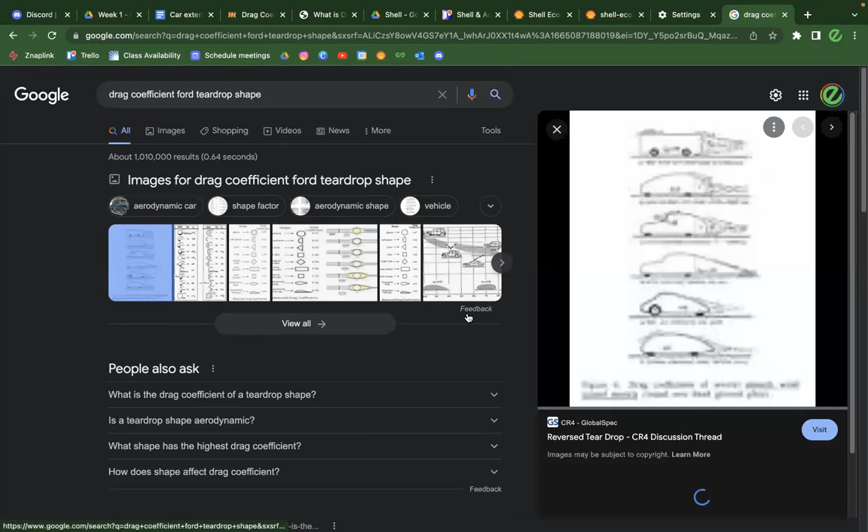Let me open up this image. All right, look at this. If you look at this image, the drag coefficient of a sphere is 0.47, but a half sphere is 0.42. The smallest drag coefficient is a streamlined body at 0.04, which is similar to a teardrop design. As you can see, look at this design and how similar it is.

To this one, see? That's why it looks like that weird oval shape, because that shape ends up creating a streamlined body and a 0.04 drag coefficient.

So we're going to end up measuring our drag coefficient in a simulation, or maybe we can calculate it. You guys have to keep this shape in mind, and we can talk later about what makes a streamlined body. First, let me go through the article because you brought up really cool articles.

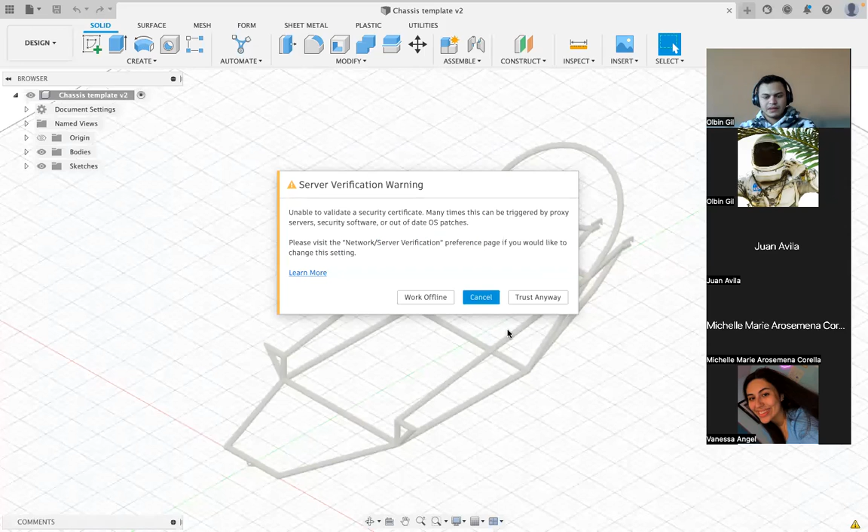Okay, yeah. So thank you, Juan, for providing those articles. It's important to know the basics of aerodynamics, because the shell - that's basically what it's going to be. Based on your knowledge, that's how you're going to create the shell, right?

So first you need to understand how an aerodynamic shape is affected by air. So I suggest, if you couldn't look at any articles today, try to look up any videos on YouTube. There's actually a really good video I'm going to share in the chat later. If you couldn't have time today to watch anything, just watch this video, and I think you'll get a better idea of everything.

But yeah, it's important, right? We learn this stuff. Let me share something else.

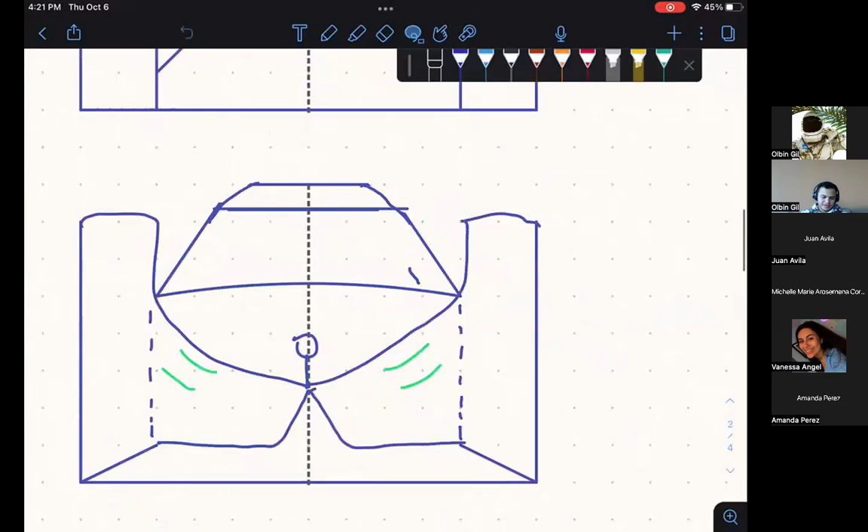Okay, so last year, to give you guys some context, I wasn't the president, I wasn't even vice president. I was like a marketing person for this club. But I ended up working on the shell, this exact part of the car, last year, and I created my own little research and made a proposal of how I wanted the car to look like.

So my idea is to make it look like this type of design, like a racing prototype car. If you guys don't know, this is an LMP1 car, or a Le Mans car. These cars are the most efficient and durable cars that you will find on the planet.

For example, in the race of Le Mans, they run for 24 hours straight at speeds over 150 miles an hour. That means they have to resist a lot of the forces of racing, but also they have to go fast. They have to make sure the design is aerodynamic, and also that they don't waste a lot of fuel. So they are very cool cars.

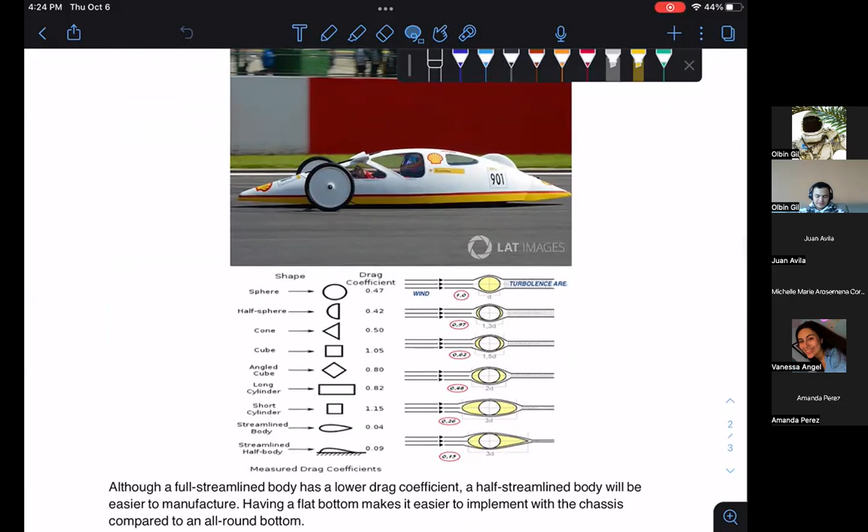So here I have also the little shapes that I showed a couple of minutes ago. As you can see, the car here is a car from the competition - the club or school didn't make it, it was just an example of how the competition wants the cars to mainly look like.

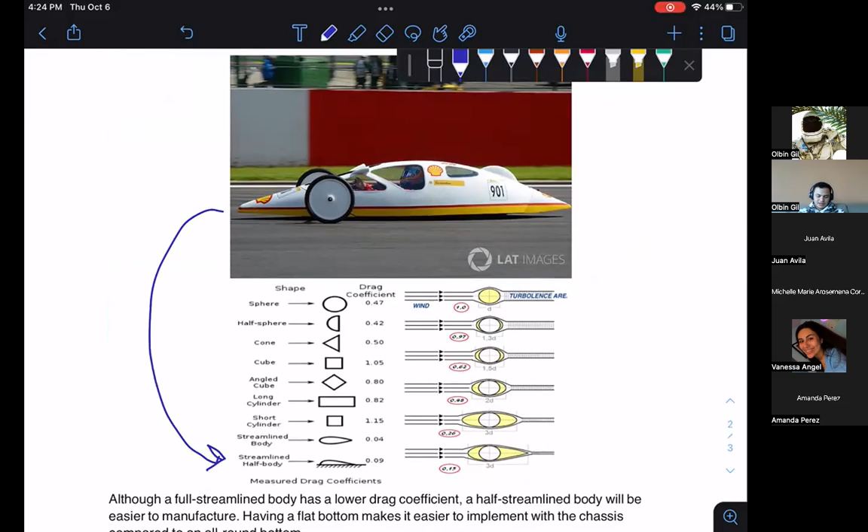But as you can see, they follow this design, and it's also very streamlined, and it just looks cool as well. It looks better than the one that we saw - this is the worst design in my opinion, it's like a half egg. I don't like that.

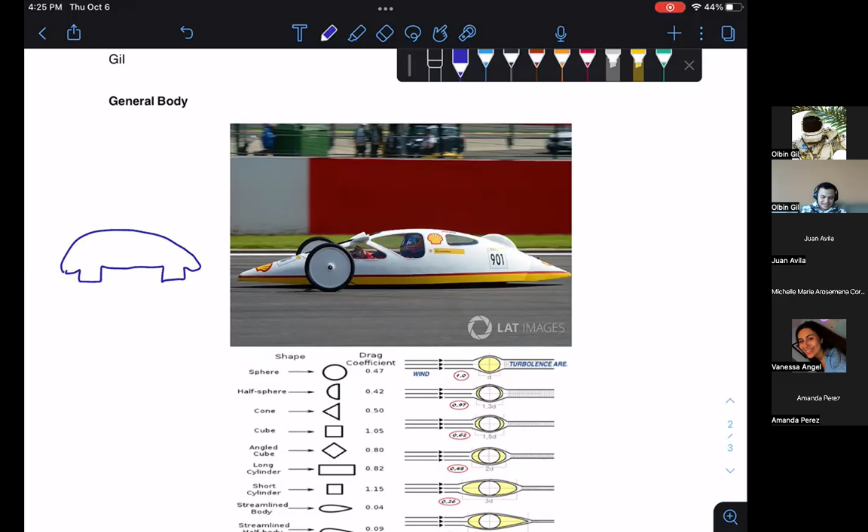So I just want to make our car look cool, you know, not just be efficient, but also look cool.

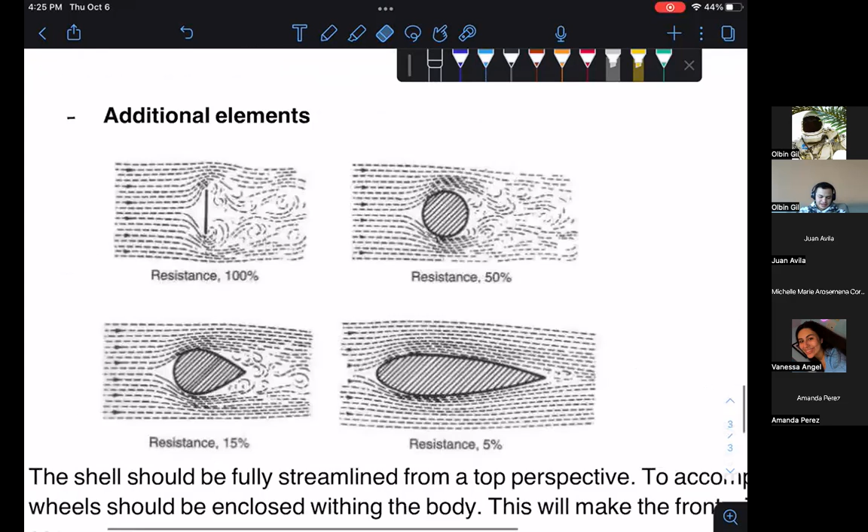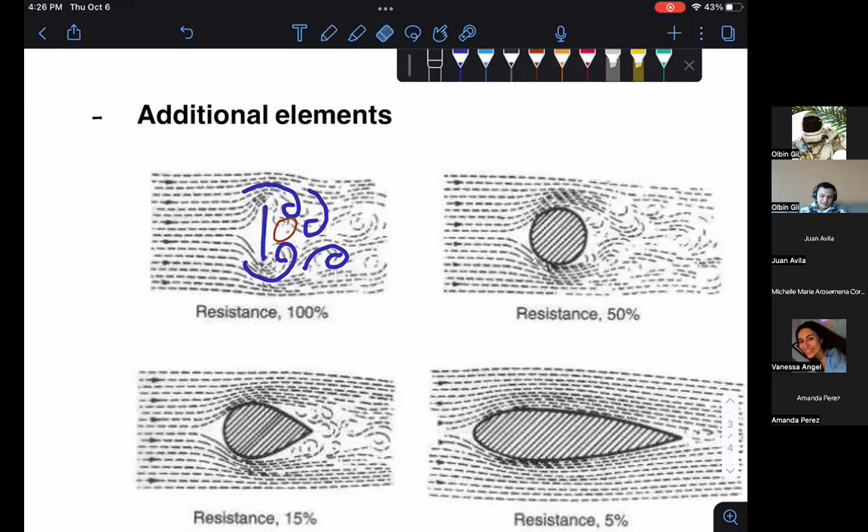So here you can see a bit of how the air moves with different objects. Here there's a wall, and you see how the air moves behind it. These vortices create a vacuum here, and if the object is moving this way, then the vacuum is making a force in the opposite direction. So to minimize that, you can round it off. But you can see it's an abrupt change in direction for the air - it goes like that, and then it still has a lot of speed, so it's going to go like that, instead of creating a vacuum here.

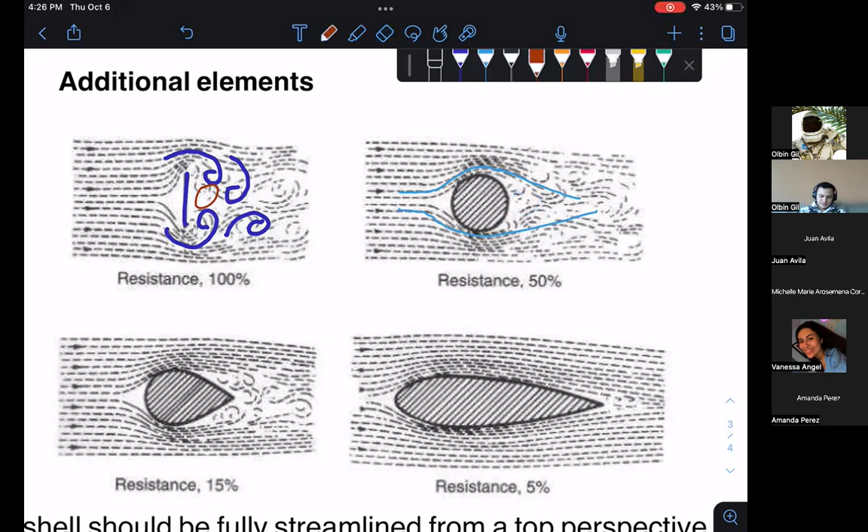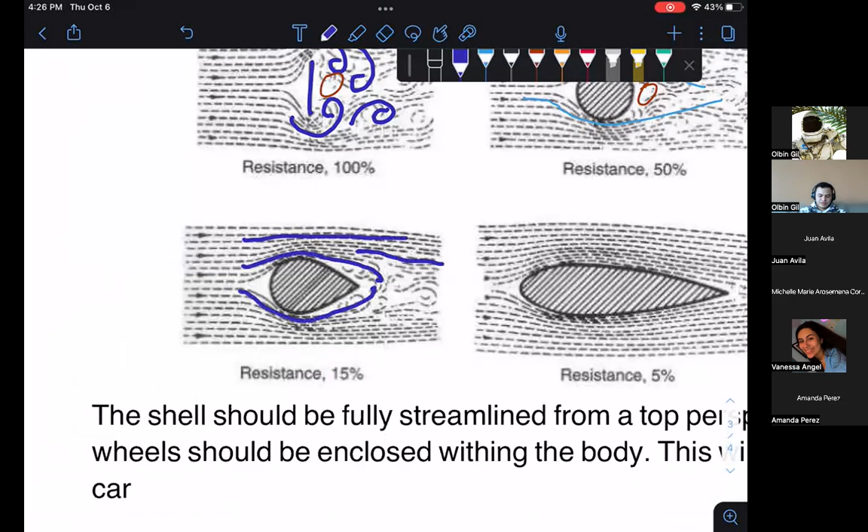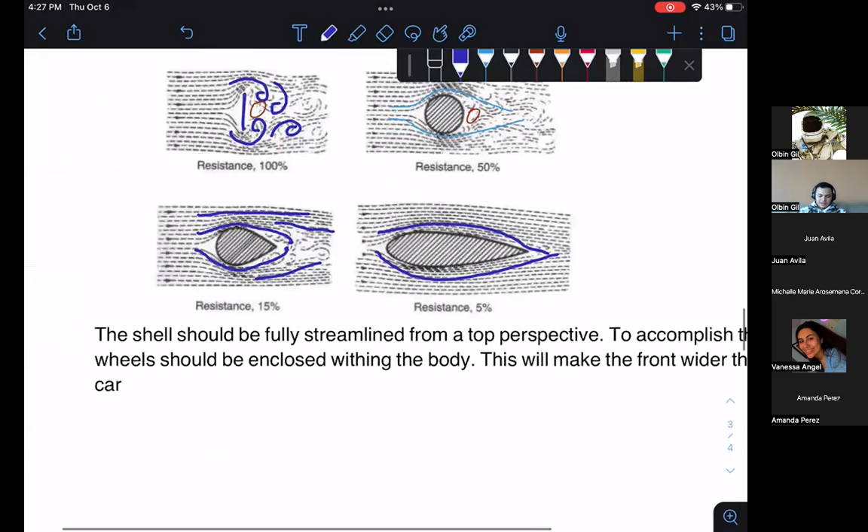And then here, resistance is 15%, and you see how it's a bit less draggy - the air is just flowing around nicely. But this one is the optimum design, where the air goes back to its initial path. So it requires a lot of creativity to create a streamlined design that is not basic.

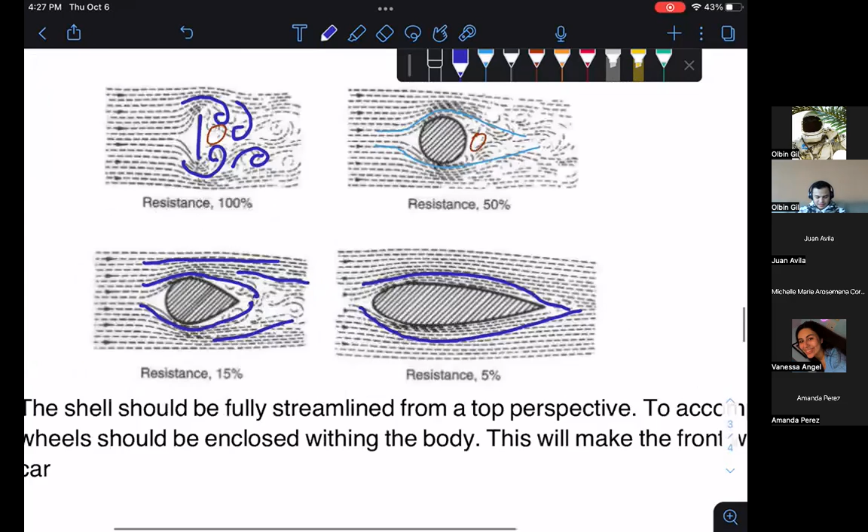You can just make a design like this one and call it a day - we could do it like that, but we'd like to be better than that. So let me show you my initial sketches.

I think it's on this one. Oh no, wait, don't look at that. I don't think I have... Okay, let me see what I can show. Okay, so I guess yeah.

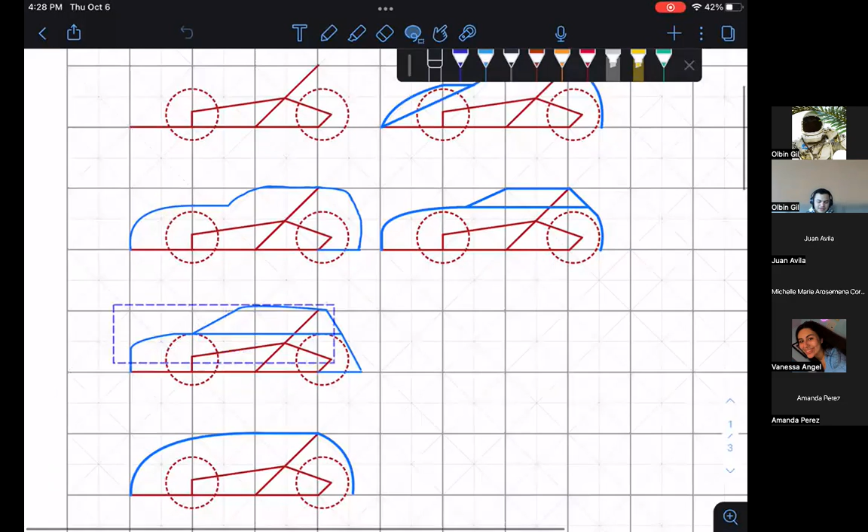So I was playing around with the design. I suggest you guys do the same thing. I first created the chassis, like a little drawing with the chassis on the side view, and I played around with different designs, how I want the different parts to look.

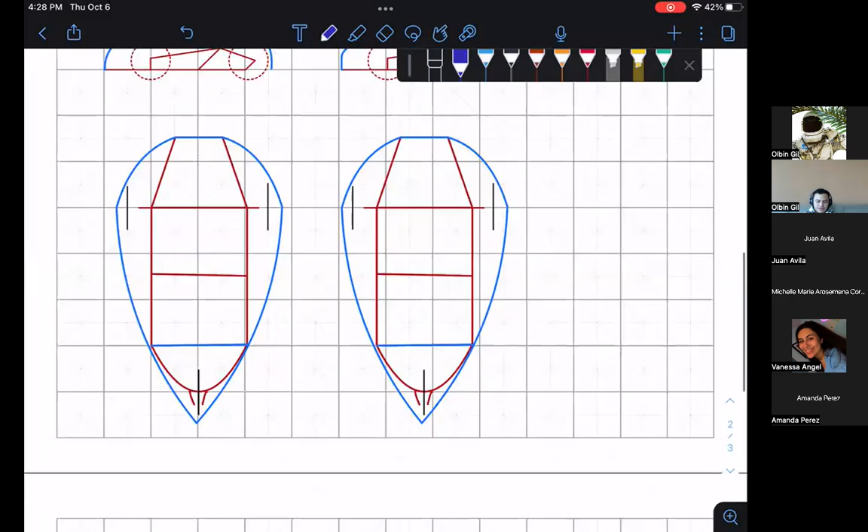If you guys don't know, we are using 3 wheels, 2 in the front and 1 in the back. I'm gonna show the chassis in a minute, and the chassis looks something like that, how the red thing looks.

But then I solidified my idea into this.

If you guys look, there's the general shape of the object. First, here's the bottom, and then there's the top side. So I created lines around it to make it look good.

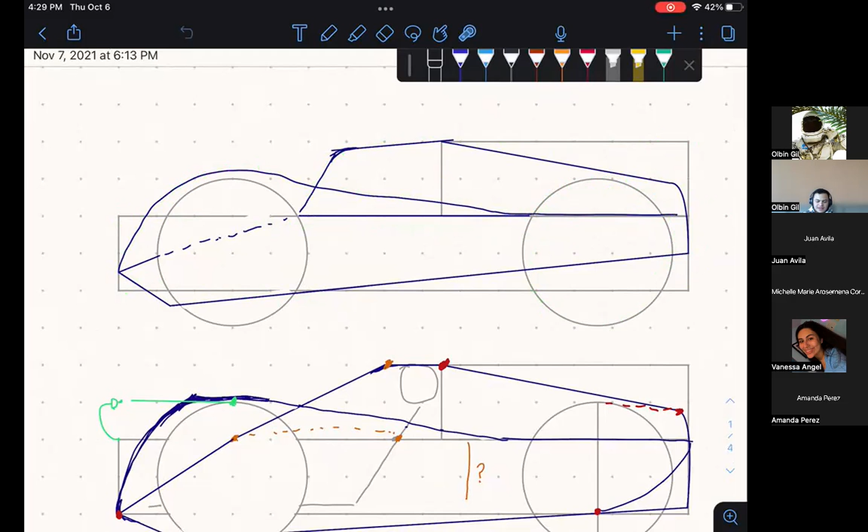But this was just a sketch. Then I made it better. As you can see, this looks so cool in my opinion. I don't know if anyone agrees, but I wish our car could look like this.

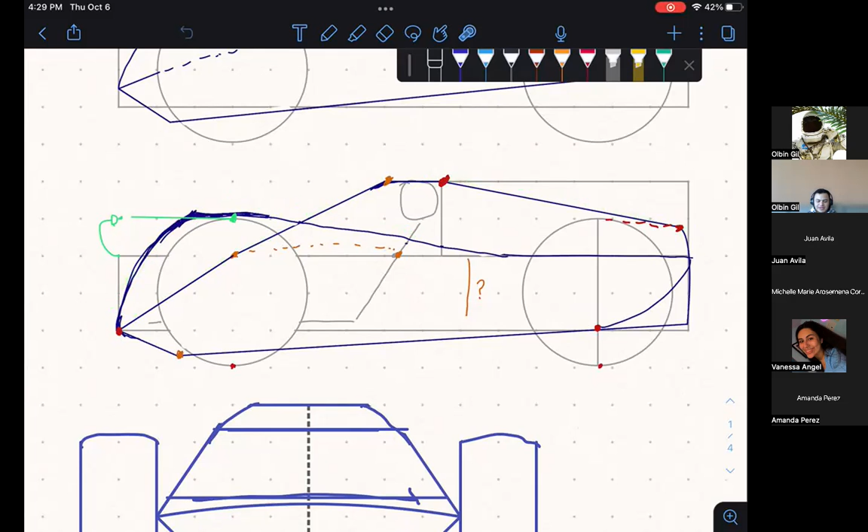I tried to make it look like a race car, like a supercar, like a Ferrari. How the Ferrari has the wheel over the nose, so the nose always comes down under the wheel, and then it has the back here, and a little thing channeling the air back into its direction. And here's the front.

So this is intended to go to the nose. This is the nose, and the lines are intended to go towards the nose.

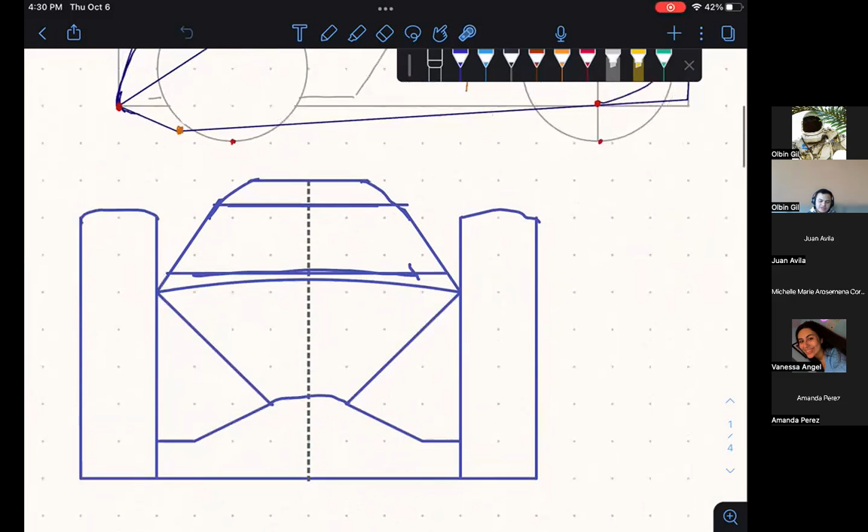Oh yeah, this is a little thing. I was thinking of adding a little logo, like how Mercedes has their star. I was thinking if we could do something like that.

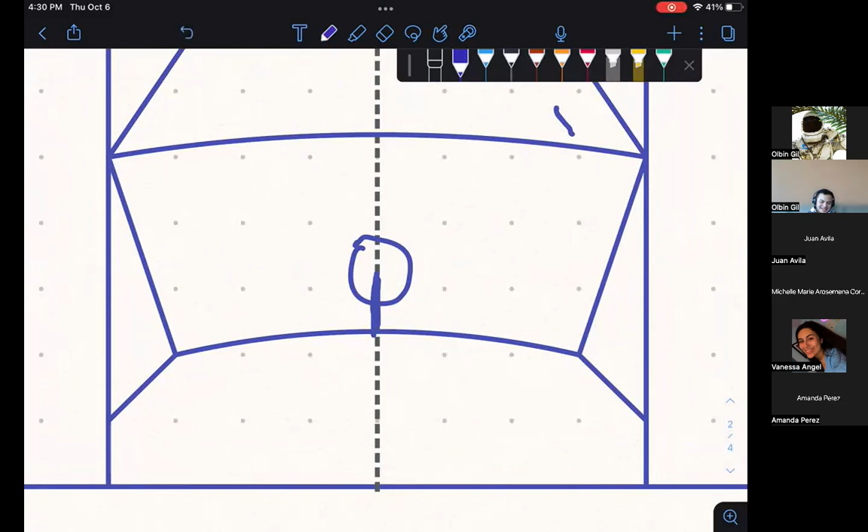And then maybe do a little thing like eco, here, let's see if I can do it like that. That would be so cool. Does anyone agree? Imagine if we could do that. That would be so cool.

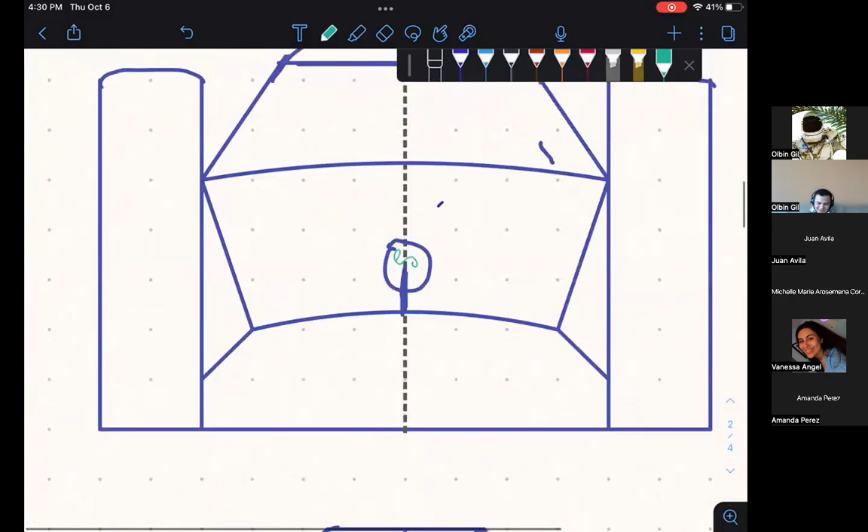Yeah, so that's my initial designs, but then if we go here, see, RV2. Thank you, Amanda.

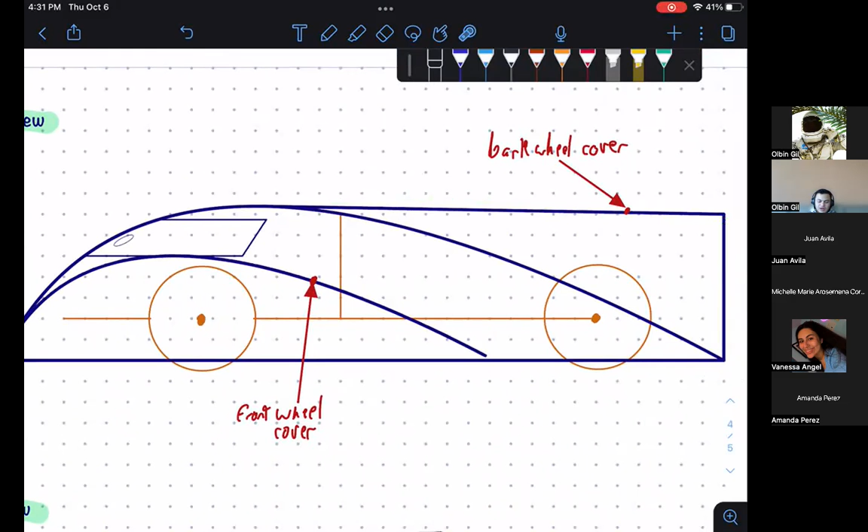As you can see, we have half teardrop designs. Let me actually use this half teardrop design here for the wheel and then for the driver. Even though it looks like it's for aesthetic purposes, the purpose of this is so that...

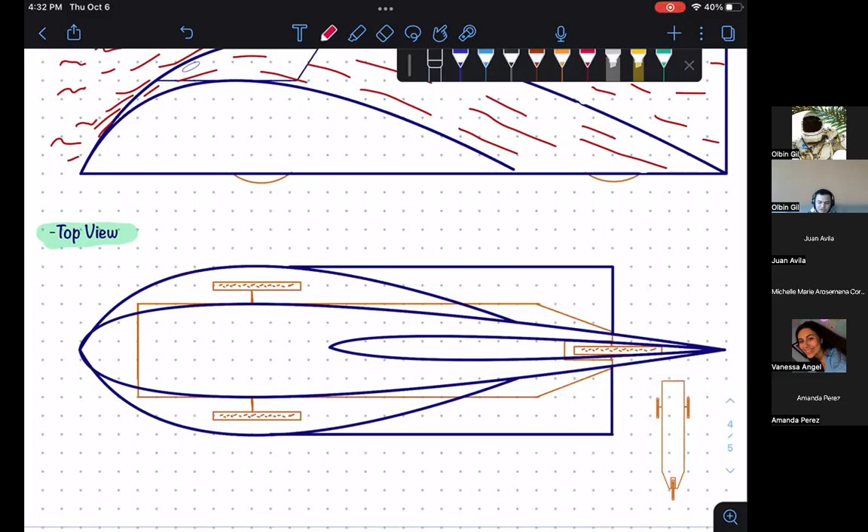Let me see if I can actually make it look like this. You know how the air was going like that? To prevent that from happening, you can create a wall, right? So the air, instead of going like that, just follows that path like that.

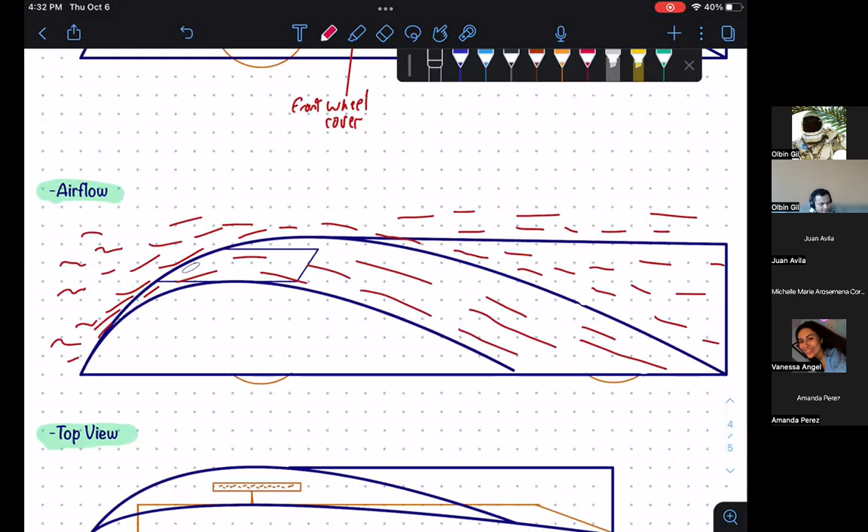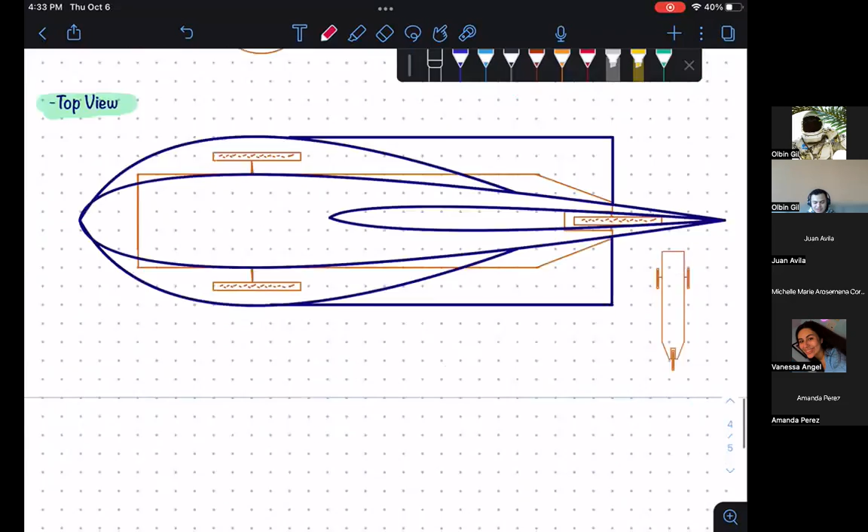So from the side view, you see how it's cool and detailed, but from the top view, it looks like a teardrop design. That's one way you can play around with your design. You can make it look cool. It's totally possible, it's just about being creative.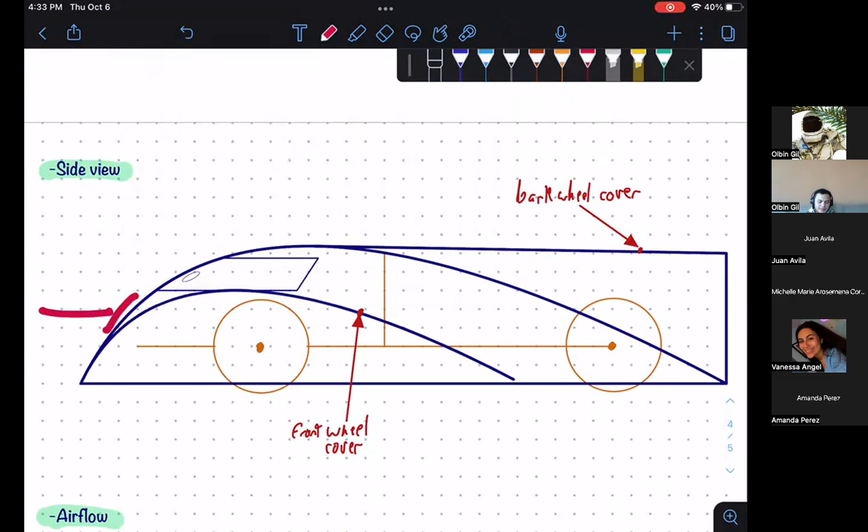Generally you want to make a streamlined design, so when the air is going this way, it doesn't hit the body so hard, it just gradually jumps and then falls back.

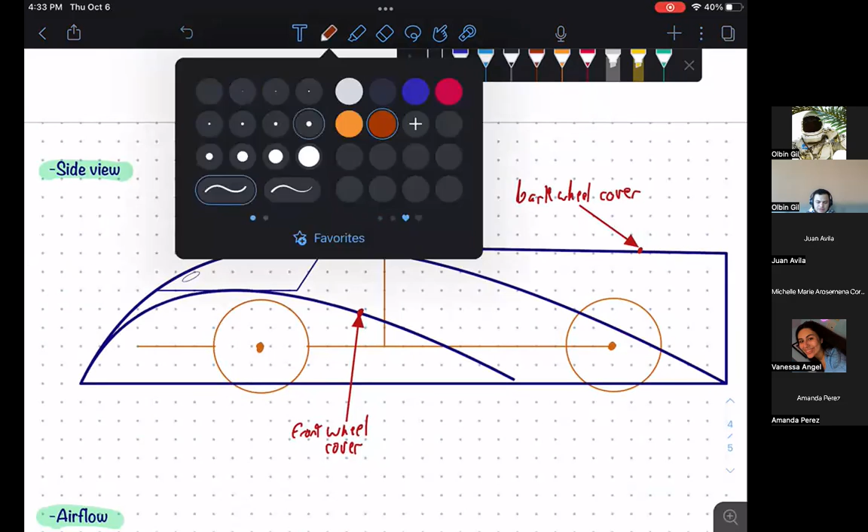And here you can see I also have the chassis here. I first created the chassis.

Okay, so if you guys can see, well, I'm sorry, you guys can tell, but I actually made a mistake here when I created this design, because this wall is intended for the driver, so the driver will go here, imagine this is the driver. This wall in our design is actually supposed to be somewhere around here.

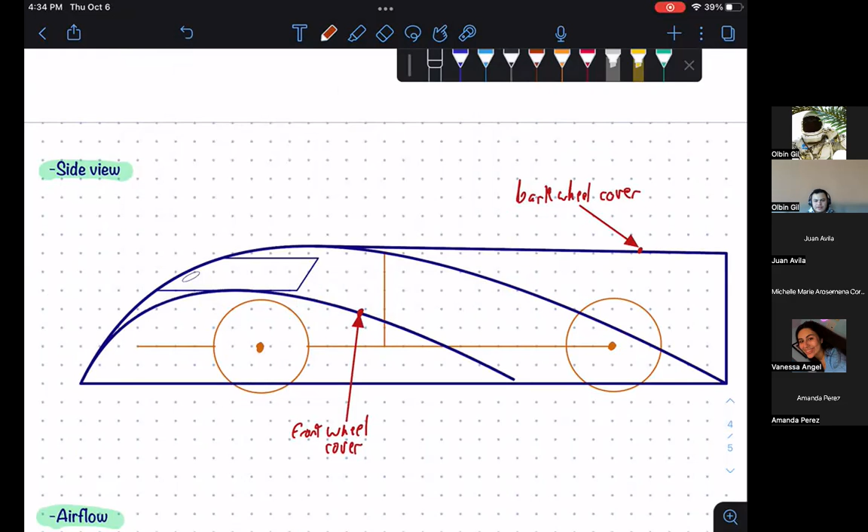So that changes the design completely, right? That's why I suggest to start first with the chassis, creating a little design of the chassis first that you can draw on top of, with the wheels, and then you create your little shell.

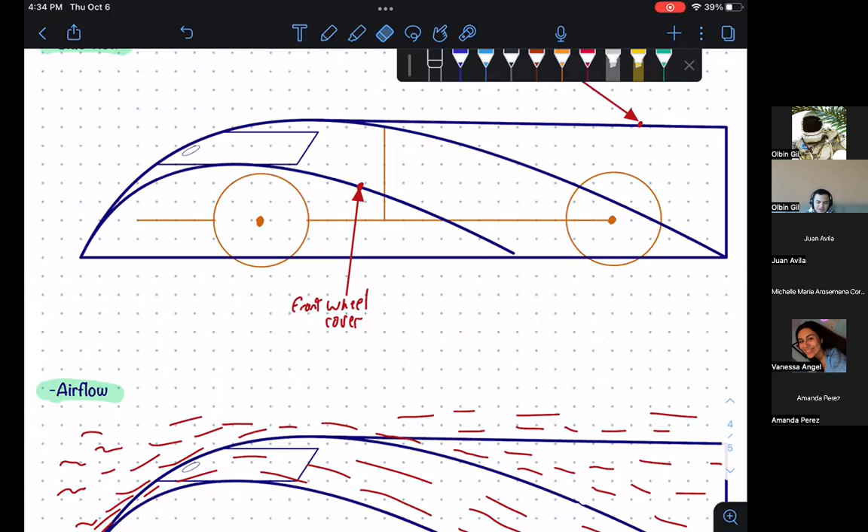So now I'm gonna show you guys... hold on, let me see how to stop this broadcast. Okay, let me show you the chassis. I think you guys saw it, but I'm not sure, so I'm just gonna show it anyways, because I'm gonna talk about my intentions, my design things.

Can you guys see my screen? No. Can you see my screen now? Yeah, we can see your screen for the iPad. For the iPad, or this, or the computer? Or I'm guessing you're on the Mac. Yeah, I guess so. Yeah, I'm not familiar with Mac all that much, but sure. Okay, thank you. Where was I?

Oh yeah, so the chassis. So this is the chassis.

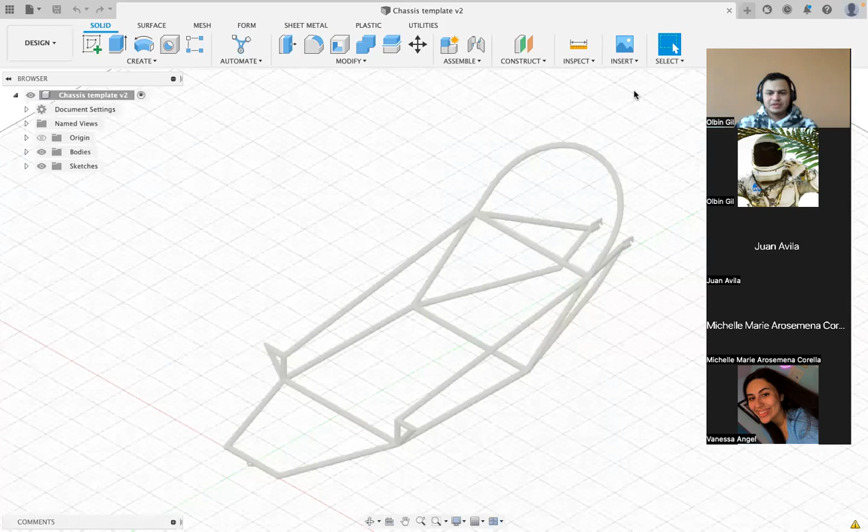Okay, so if you haven't downloaded Fusion 360, I suggest you download it this week, of course. And to get this file, what you do is go to the drive.

This thing's so slow. You go to the drive, and then go to the folder you guys have access to, your folder, the show, because that's where I put it. The show. Hold on, it's loading. Okay, and then resources - I added a new folder called resources. And then here you see there's a chassis template step file.

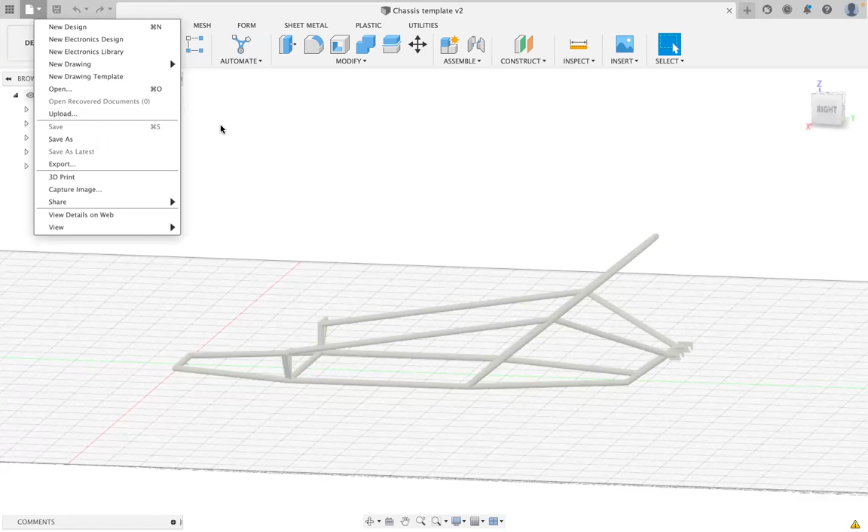So when you load up the program Fusion 360, what you do is import the file. You go here and then upload, I think, and it will let you upload the file into the program, right?

So yeah, let me see if I can annotate on my iPad. Yeah, I can. No. Okay, whatever, okay look, so...

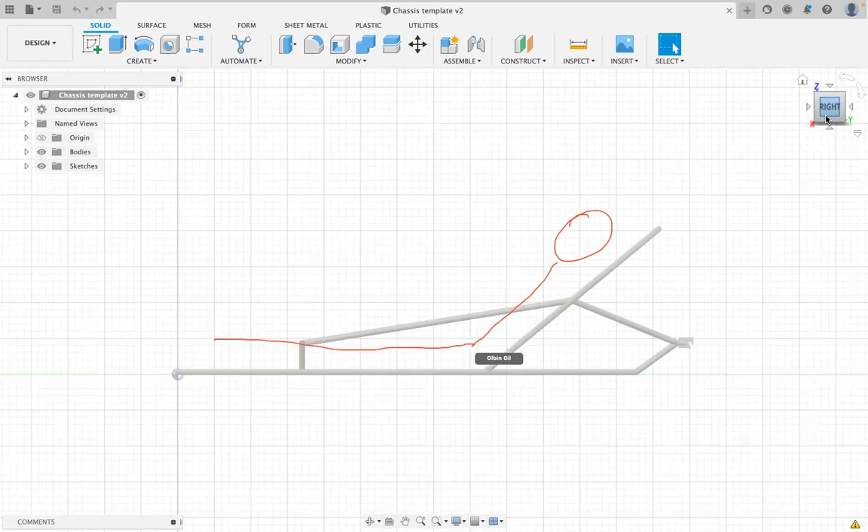The head of the driver is gonna go here, just like that. The feet are gonna go like that, and the wheels like that. I mean the hands like that, and the steering wheel should be like that. So, and the wheels like that.

You guys can see the drawing, right? Yeah, I could see a drawing. Okay, good.

So what you could do is, there are many options of course, but there are two general options. Do it like that, do the shell like that, or you could do it the cool way, adding that little complexity and making it look like a car.

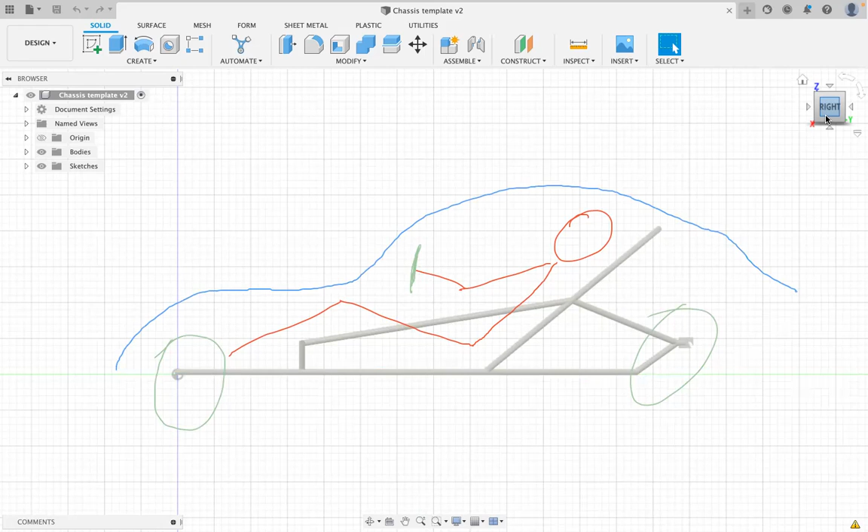But the thing with this design is you have to know where the steering wheel is. Because if you don't know where the steering wheel is, what will happen is that the shell might be too low, right? So you guys will have to later on communicate with the steering team to figure that out.

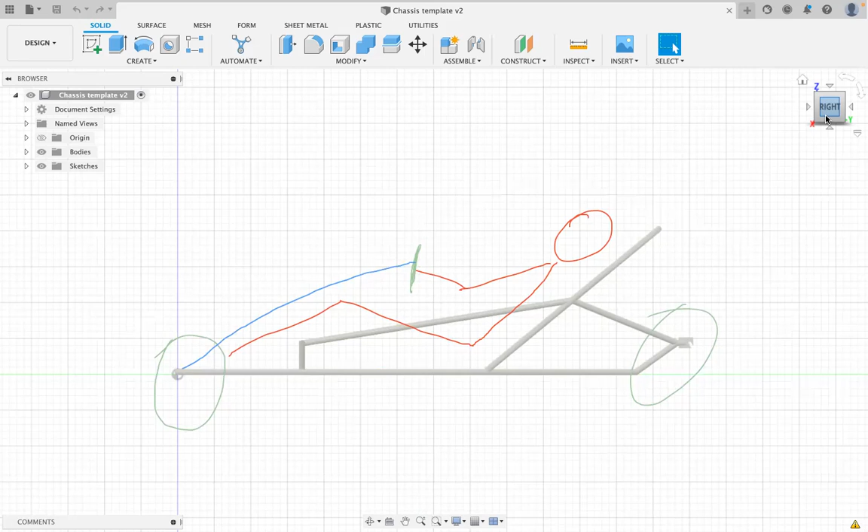But yeah, you guys can do this later to create a little draft. We'll talk about that later.

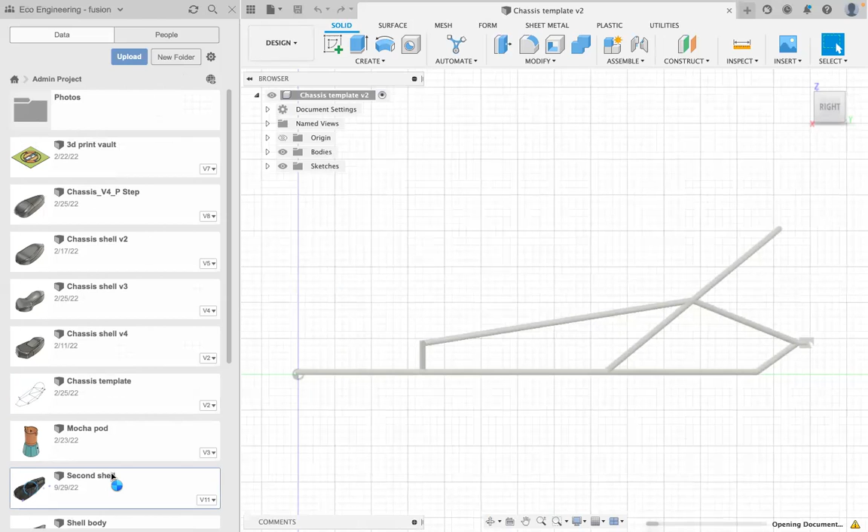Let me open up all the designs. So this is one of the first shells I created. Low, okay so...

Give it a second. Okay, so look, this in my opinion looks really cool, but unfortunately it doesn't work because of the chassis. You see how the chassis is extending outside the shell - because what happened, if you guys didn't know, I don't know if I talked to you, since I think I'm repeating myself with different teams, but I don't know who I'm talking to because I've talked to so many teams.

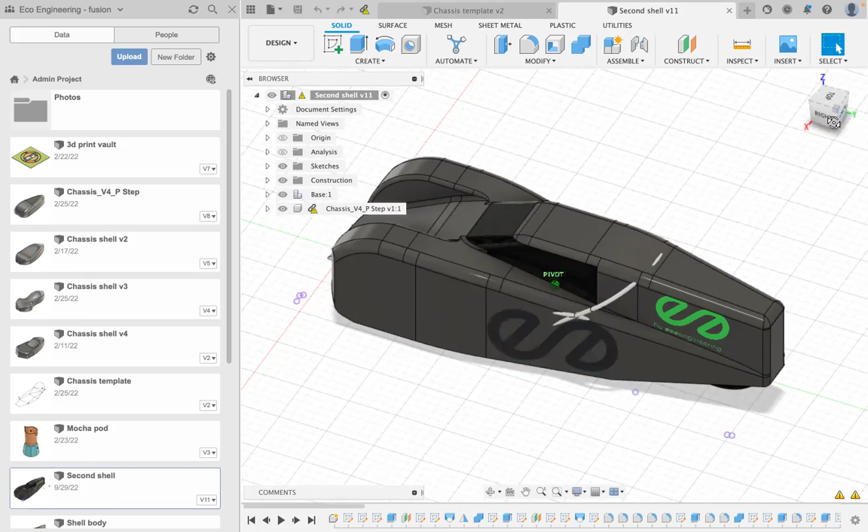But yeah, I didn't get the chassis file before I made this. So when I put the chassis in my design, I found out that it didn't fit, right? So that's why we're not gonna use this design, even though it looks cool in my opinion.

Okay, all right, yeah. So look, you see how here it looks like a teardrop design? So it's like - what was I talking about - you can make it look cool in different ways. So it is still following that kind of design on the top.

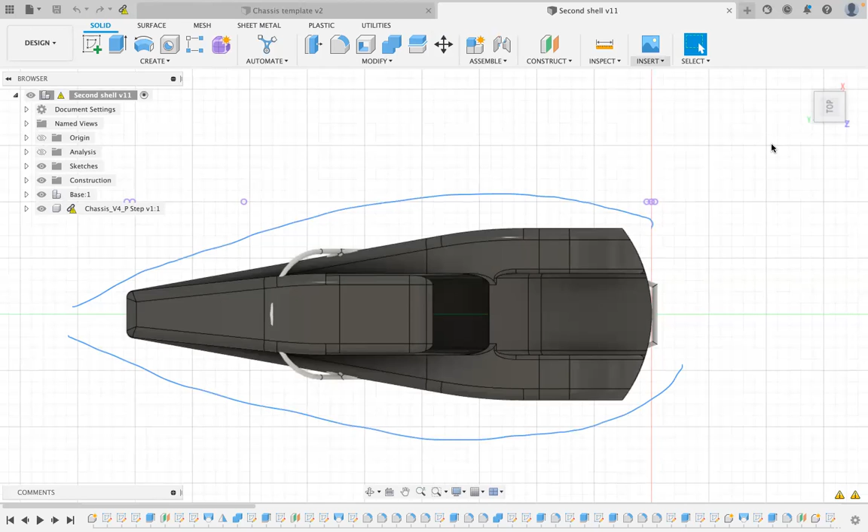On the side, it has that teardrop design here. You see? So that's just showing you some examples, right? But the one I was looking to make was this one.

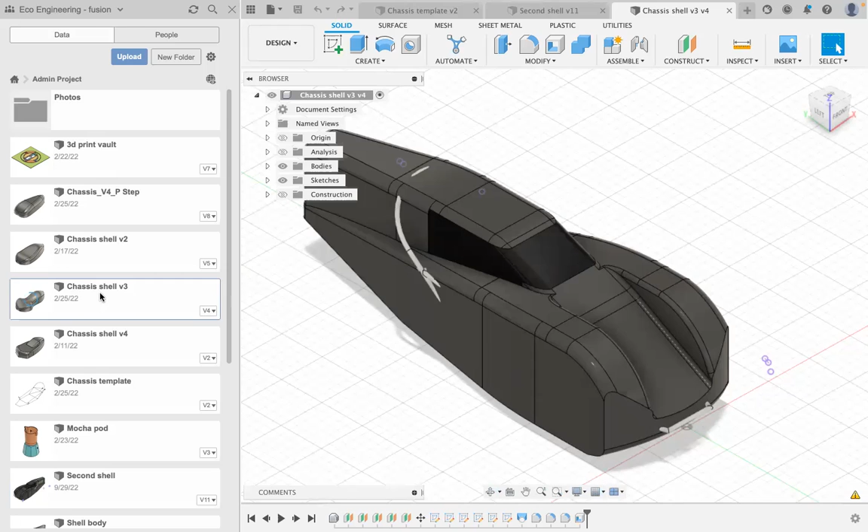I think this one is better. I'll teach you guys how to make something like this later, because it took me a while. Figuring out how to do this took me like 3 hours, but if I'd known the technique beforehand, I could have done it in 30 minutes. Once you figure out the technique, it's very easy to do.

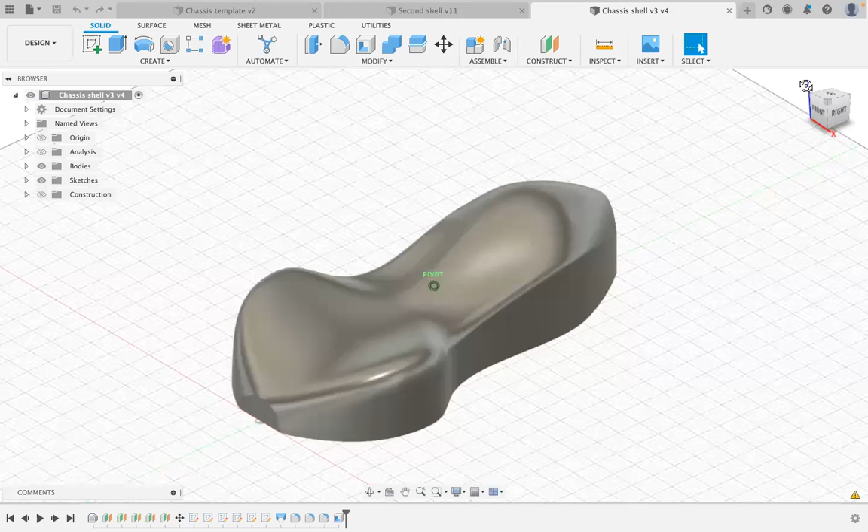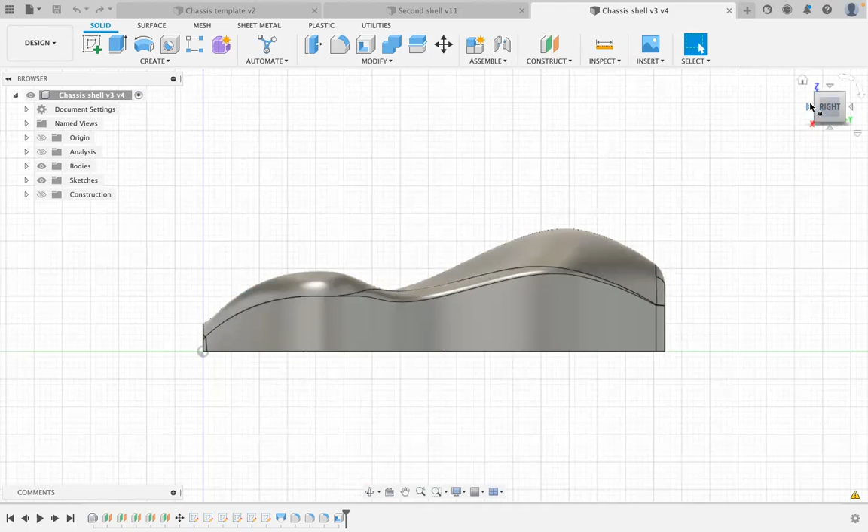If you go here, it doesn't follow the teardrop design exactly like how the other one does. Wait, let me actually show you. The air goes like that, and then like that, right? Which isn't an optimal design, but I did it just playing around.

Hold on, let me see. I just gotta check the message. Sorry if I didn't answer any messages, it's kind of hard to look at two different devices at the same time.

How is the driver chosen? That's a very good question. The driver is chosen based on who's the lightest person, since whoever is lightest gives us a better chance to win. Last year I was the lightest person, but this year I don't know, so we're going to weigh everyone at some point and figure it out. If that person wants to be the driver, then they will be. If not, we move on to the next lightest person. So if you're pretty light, you might be a driver.

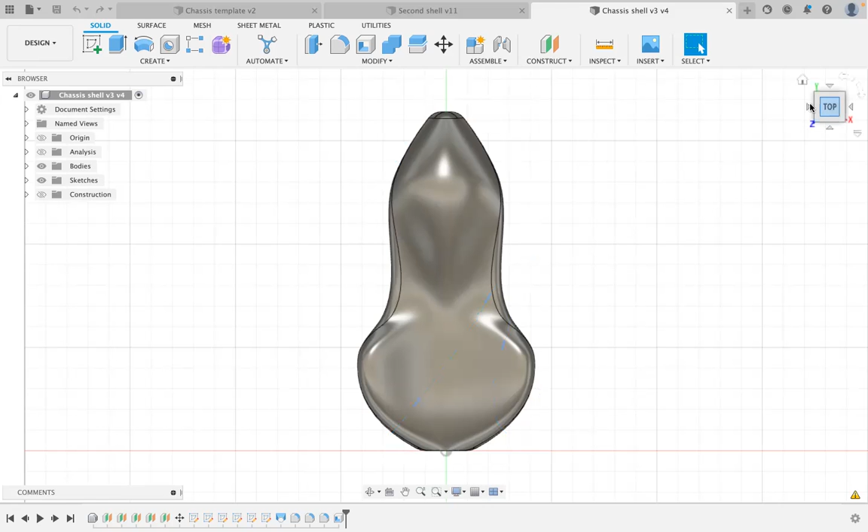But yeah, look here. It doesn't follow a teardrop design exactly, but it's still streamlined because the air, as you can see, goes back and closes back into its original shape, into its original path. So the air goes like that, something like that, still going back to its original path, creating little drag. But yes, that was that, I wanted to share that.

At the moment, does anyone have any questions about the design, or any general questions about anything we've talked about, or any comments? Because I've been talking for more than half an hour, and I'd prefer you guys to have a discussion.

I guess for me, my one question is, I've never used Fusion before, but I do plan on downloading it. I have a lot of experience with SolidWorks though. Would you say a lot of the skills from SolidWorks transfer over to Fusion? Is it pretty easy to pick up if I already know how to work with SolidWorks?

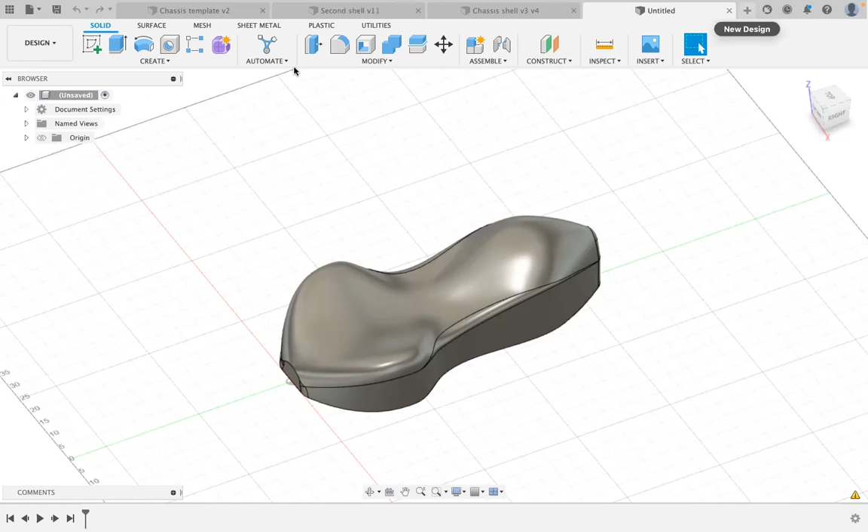That's a good question. Someone asked what the name of the program is - it's Fusion. Before I get to your question, let me show you something very important.

I hope you guys are on the Discord. If you're not, please be on the Discord because I'm going to put important information there. If you go on the Discord, let it load, and go to resources. You'll find instructions there about how to download Fusion 360. Open this document here.

You're going to get instructions for downloading Fusion 360, and also some tutorials that I put there. But I suggest you look up more tutorials yourself, searching so you're able to learn about each feature in Fusion 360 really well. This document can help you get started.

It's free for everyone to use - that's why we're using Fusion, because with SolidWorks you have to pay a license to use the program, and you have to have a Windows computer. I have a Mac, as you guys can tell, so I'm done with Windows computers - that's just my personal experience. We're using Fusion 360 because anyone can use it, and it's also very easy to use.

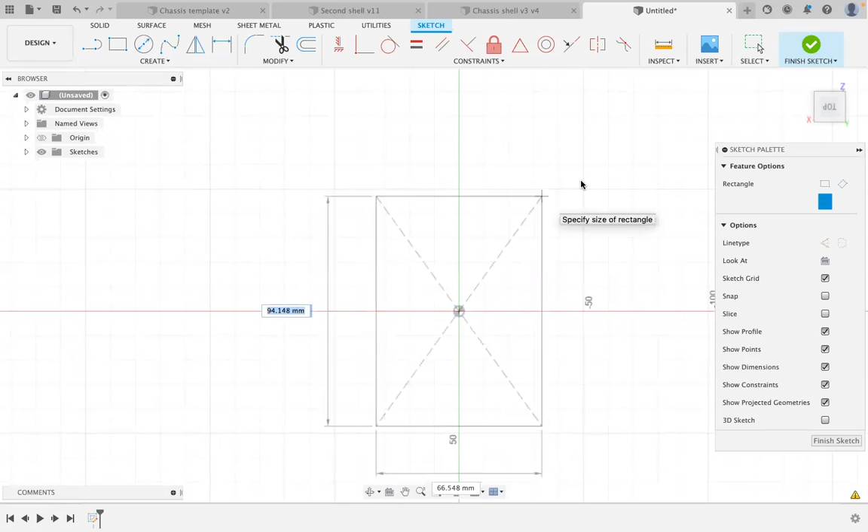It looks simple, but that's because of the user interface. It's actually very complex. You can do a lot of things here.

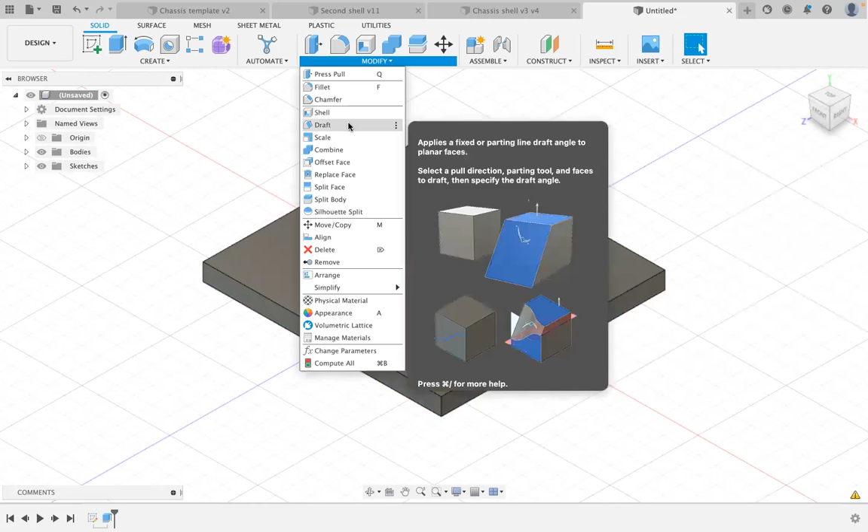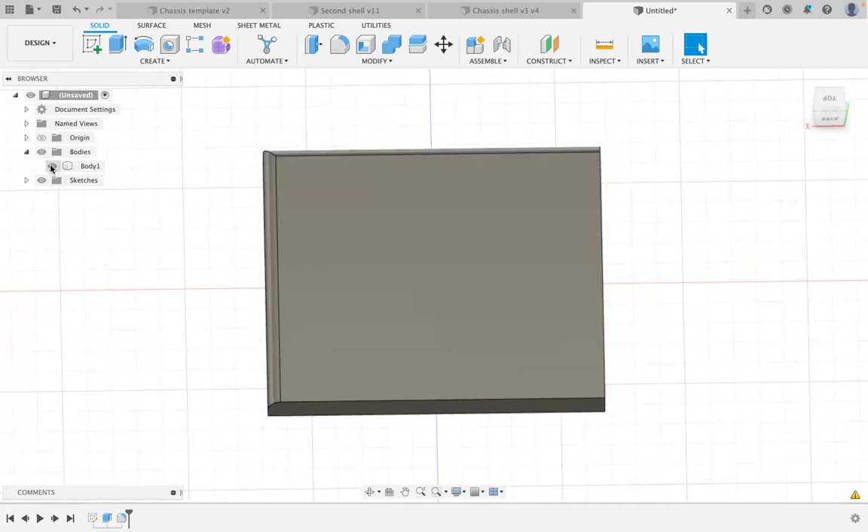So you can do this, so 5. Yeah, I created a little tile. As you can see, it's very simple. The only difference is where you look at the bodies, it's different. So here is the body, and here is the timeline.

It's a very cool feature of Fusion. You can look at the items how they were before, like a little replay. You see.

So does anyone have any questions on the program? Did I answer your question, Juan? Yeah, I'm good. I'm good with it.

I think I got a question. Yeah, so if you guys have any other questions or any problems, just send me a text or reach me on Discord. I am here for you guys.

Yeah, I was gonna say, for the next time we're gonna meet in person, if you attend the general body meetings that we're gonna have in October. I haven't decided on the date yet, but we're gonna of course see each other.

To actually work on this stuff, the next stage will be the building stage. Right now we are in the design stage. In the building stage, we are going to build the shell, and for that we need to be physical. But right now, not everyone has to be in the same room to do their own stuff. So it's more convenient to have everyone virtually design in their own time.

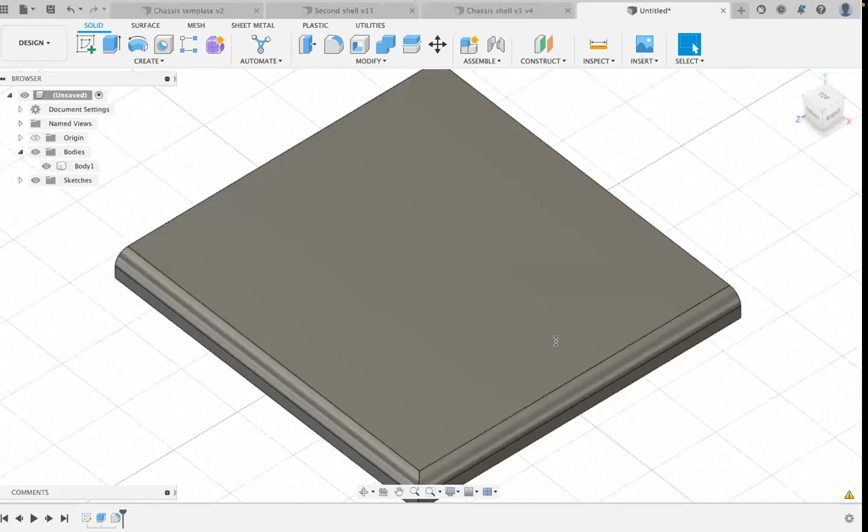So what Douglas had, let me go - where is it? What Douglas had was, so we got this done. They should get familiarized - is to understand the shell size, considering the chassis, the driver, and wheels.

But what I also want you guys to do is create a drawing of how you intended, how you are intending the shell to look like.

So my plan is for you to, if you have an iPad, you can draw, create a drawing like how I did. But if you prefer to draw on paper, you can draw on a piece of blank paper or graph paper, and create your own design.

What I want you guys also to do is, like how I created a front view, a side view, and a top view, I want you guys to do the same thing - create a front view, top view, and side view of the shell, of a design of how you would like to make it look.

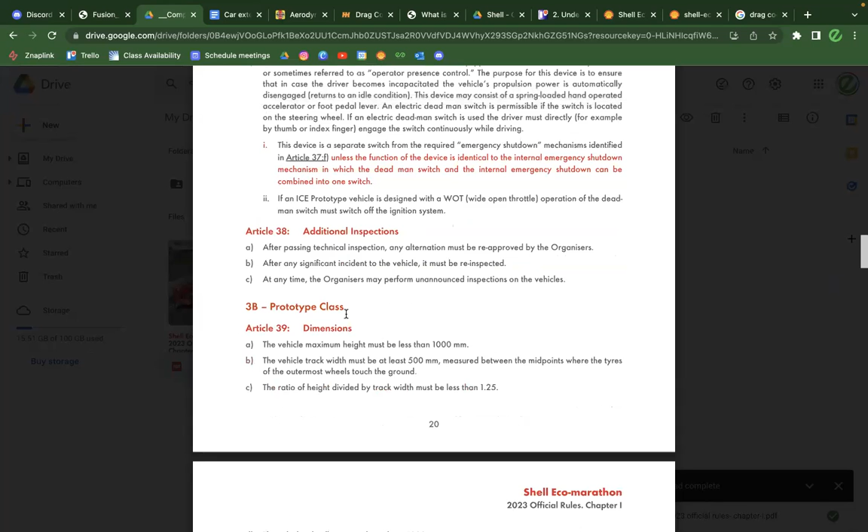You go there, and then you click on what you're looking for, like vehicle design. We were looking around general dimensions here, so we jump to dimensions, prototype class. We're in the prototype division, the prototype class, and here you can find the information. I suggest you guys look into this document as well, because that's basically how we're making the car.

But I also want you guys to do something else. For that, I need to show on my iPad.

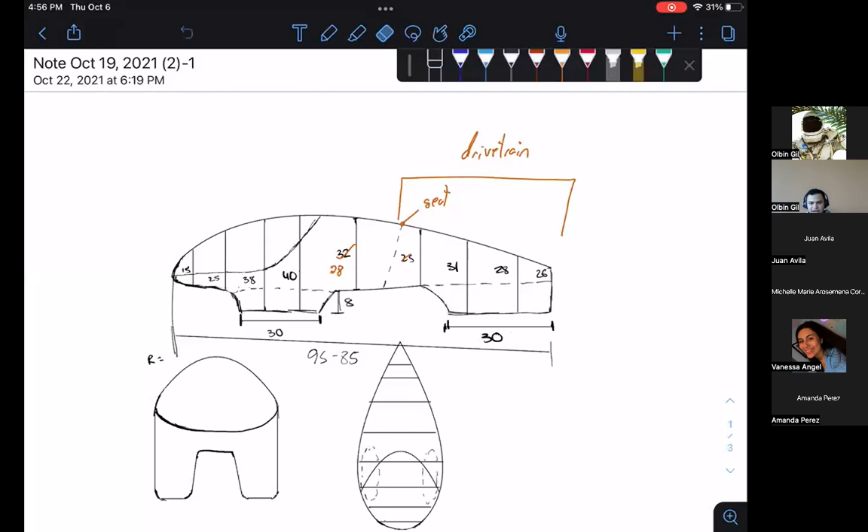So this is a design that Sebastian did, our vice president. He has the side view, the front view, and top view, but he also has dimensions, right?

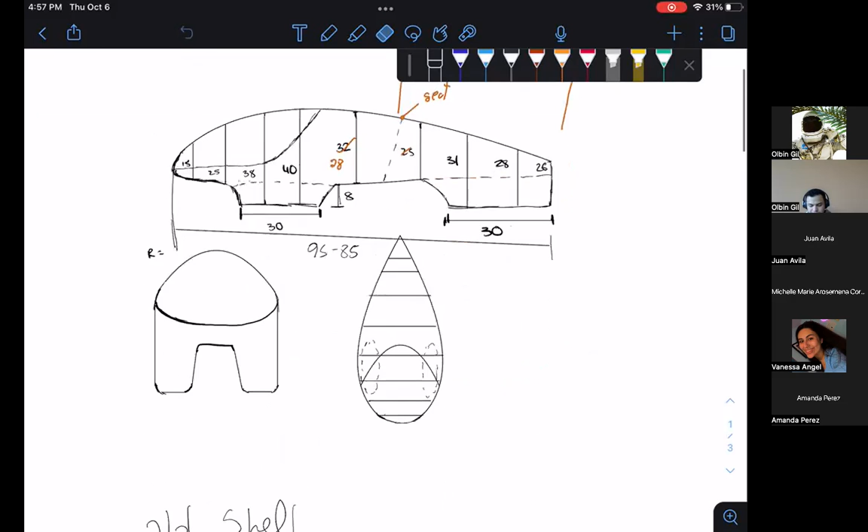So I want you guys to do the same thing, to do this, but also create dimensions to make sure they make sense once you go into that CAD program and start designing.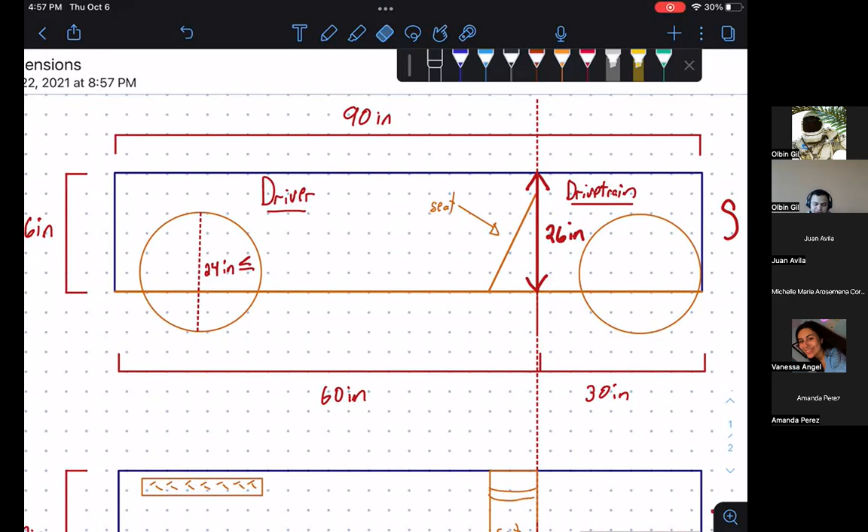As you can see, I have the length that is 90, the height is 26 inches, and the width is 30 inches. So I want you guys to do something similar, to make sure your designs make sense once you go into the CAD program.

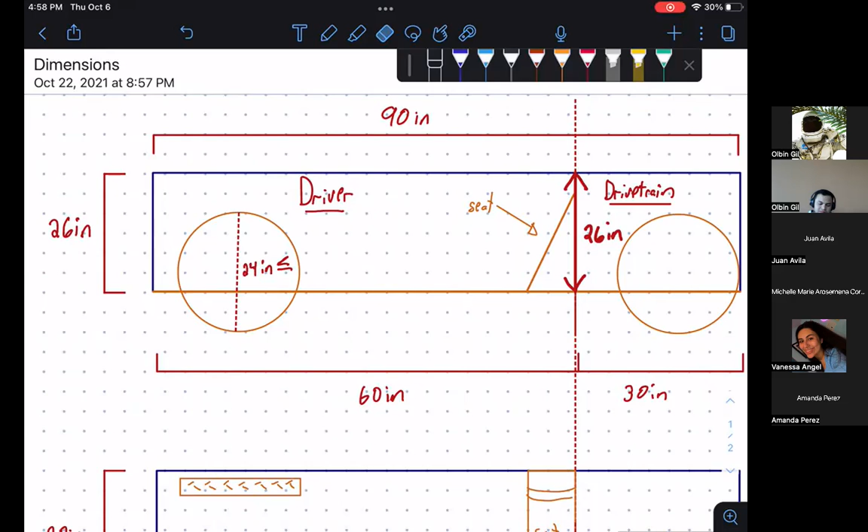All of this that we're doing is to eventually go on CAD. And honestly, it's after doing a lot of CAD work, you know, what's it called, it's important to create a draft.

But yeah, so Vanessa, yeah, so basically that was the whole thing. Oh wait, I think Vanessa already left. But yeah, so...

Yeah, so that's basically the assignment for next week. Just create a drawing, an annotated drawing with dimensions and notes, and the front view, top view, side view, based on your understanding of how we can make a streamlined body, and also based on your creativity, how you want the shell to look cool.

But yeah, so that's what we're doing next week. Does anyone have any questions on the assignment or anything else?

All right. Okay, yeah, so I forgot to mention something else.

So if you prefer to do the design on a piece of paper, what you could do is you do the design, but then you scan the paper. I'm going to explain how later, like on the text message. You scan the paper with an app, and convert the scan into PDF, and then upload the PDF into the folder.